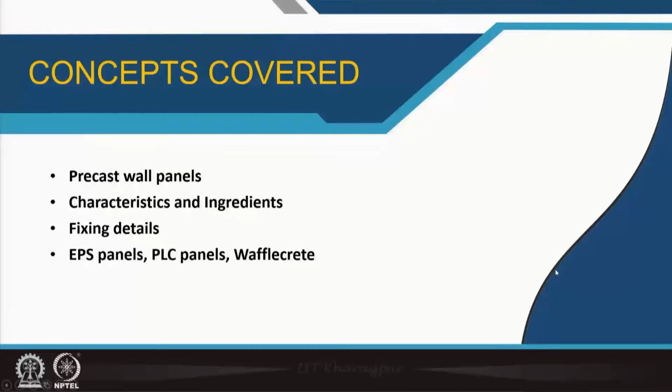Here we will be discussing precast wall panels, their characteristics and ingredients, the fixing details, and also other kinds of panels - EPS, that is expanded polystyrene panels, large concrete panels, and wafflecrete, along with puff panels. But these are mostly made from concrete.

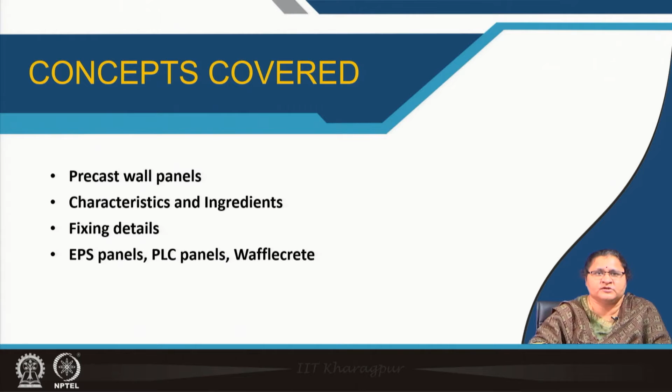These panels are dimensioned relative to their thickness. If you are planning for something very thin, 48 times that will become the thickness when it is flat. If you have corrugations, it will also be 45 times when corrugated - this is a thumb rule. So if you have 30 millimeter thickness, 30 cross 48 will become the size.

Usually the composite panel varies between 95 to 180 millimeters. Composite refers to two panels with a central space, which may have a void or be filled with some material to hold it together. These panels are separated from each other.

But if you are not looking for thermal comfort, you can work with a single layer or single panel. So something around 1.5 meters by 1.5 meters will be its dimension if it is 30 millimeter thick. A 60 millimeter thick panel will have a 3 meter by 3 meter size without corrugation, and any damage to such thin walls can be repaired.

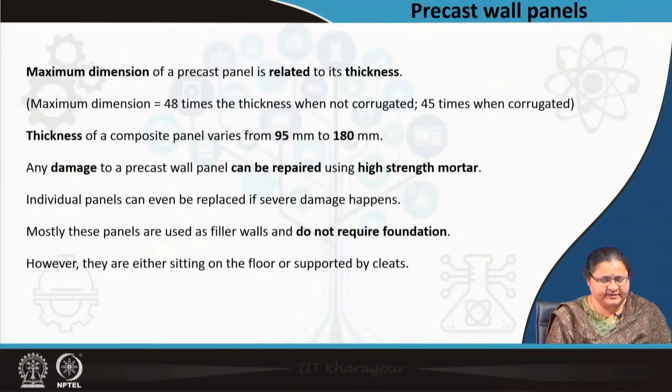These can withstand a load up to 35 Newton per millimeter square, and there is no requirement of formwork. It has very little maintenance cost and is less labor oriented on site because these are already made by a labor intensive process in a controlled environment. And as I told you, when it is a non-load bearing wall, it is a curtain wall. For high-rise structures, these are preferred.

For underground structures where you require to retain the wall - basements below the earth - we usually go for concrete walls. Instead of cast in situ concrete, you can assemble the panels one after the other to create the coverage of the basement wall. What is important is the joints - we will come to that.

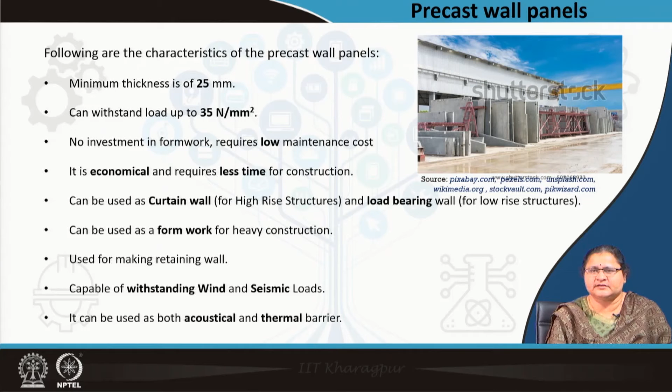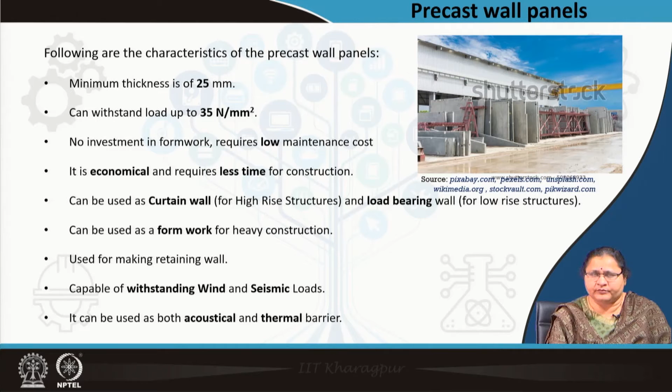These panels are further capable of withstanding wind and seismic loads because they are large in size, and they can act as acoustical and thermal barriers when they have a composite nature - that is, two walls together with an air gap, or filled in with EPS or glass wool. So now we move to how they are fixed. As you see a clearer picture, there are many points for anchorage, and you can also see some rods popping out.

So these rods, when they are popping out in this picture, on the lower end you can see there is a place to receive that. So the panel below it will be held at these points with these projections outside. So there is a dowel system.

There is a drawing after this, so I will go to that also. You can see here they are anchored at several points to lift it. Again, there are dowels projected out to rest on the previous one to receive the upper panel. So this one will go and sit on the dowels left below it.

Other than that, there is the backer rod, which I was discussing in my previous lecture when I explained the CMU block being assembled with an iron or steel column. There was a provision or gap through which water and air would have entered. Here also, when two adjacent blocks are sitting, you have to seal that joint. You cannot use mortar, no one can go and put mortar for a 3 meter length. So there also you need to have a dry seal.

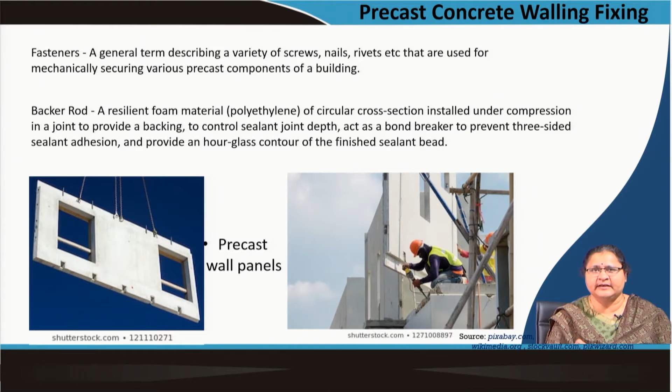Other than this backer rod, sealing etc., the fasteners are being used - the screws, nails, rivets etc. They all refer to the mechanical processes which may be required to tighten the panel in position or keep the panel in position.

So here you see a schematic drawing. These are the dowels, so dowels are embedded when it was made, and these are the slots which are kept to receive the dowel. So these are hollows left to receive the dowel. On the upper side it is the dowels projected up, so they will go on which the above member will rest further. So inside you can see void.

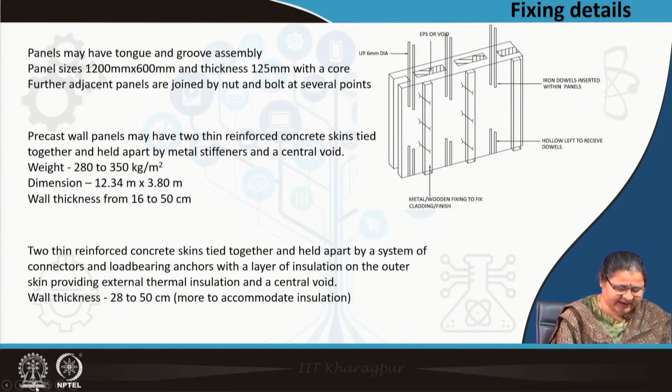What more you can see? You can see a notch. Sometimes if it is quite thick, you can have a tongue and groove joint, so two members can slide one inside the other. So you can have something like one member moving into the other member. So here you see there is a tongue and groove kind of joint here as well as here. Simpler the better, so you can assemble it this way.

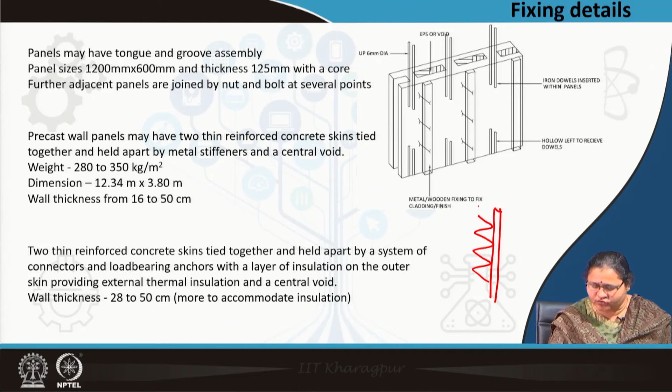You can see some members called the spacers, which can be in this form holding two skins or two precast members with the gap, the required gap. So this kind of spacer you will see is separating the two members. So there may be another spacer at interval, there may be another spacer after some time.

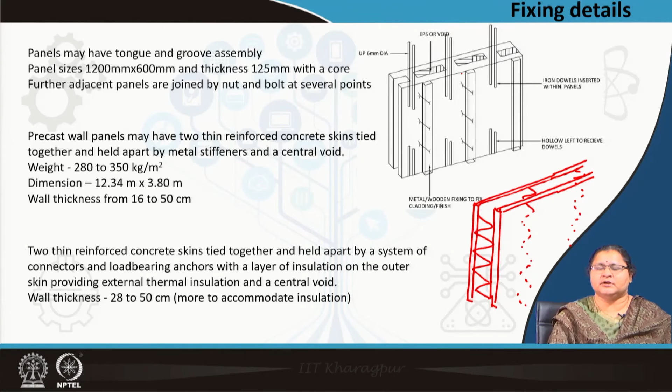Inside it is totally thorough hollow, or else it could be filled in with some glass wool or EPS - the full form is expanded polystyrene, we will come to that. So various thicknesses of individual panels held together in position by spacers can be cast and brought.

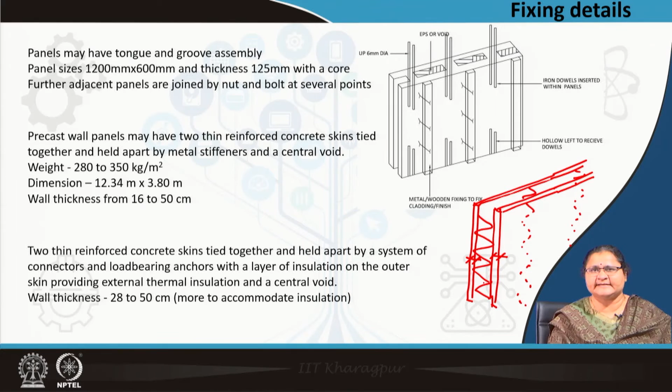Here you had seen the joint. If it is a steel section, your entire panel could rest inside the steel section, so there is no groove here, so it could move into that. So if it is a heavy section, this kind of panel can enter here.

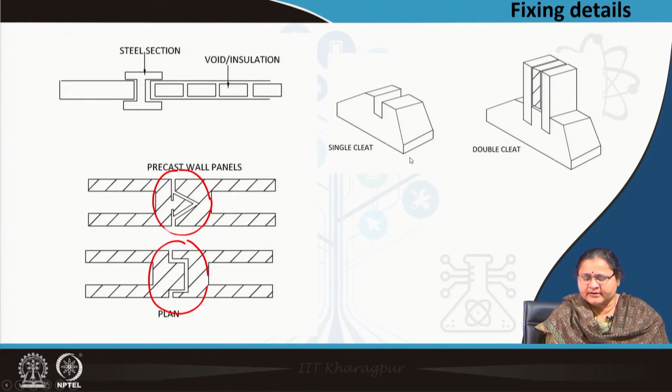Coming to the cleats, how it rests on the floor - these are cleats, these are supports made with concrete onto which the panel rests, onto which the panel is resting. So the panel will be passing through this and it will be resting. There may be another cleat after some time, so this interval, this overhang etc. are to be calculated out.

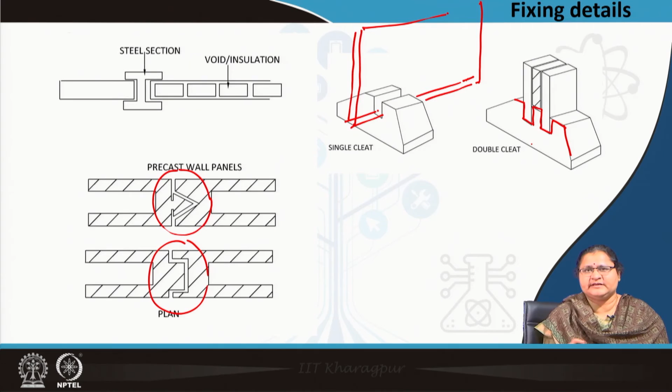Here also you see this is a double cleat, so there is a double notch, so there is no possibility of movement of this member. So this is the panel sitting - here I have drawn that, here it is already made. So it is a double panel within a double cleat, so it is resting on the floor. Hope you understood the phenomena.

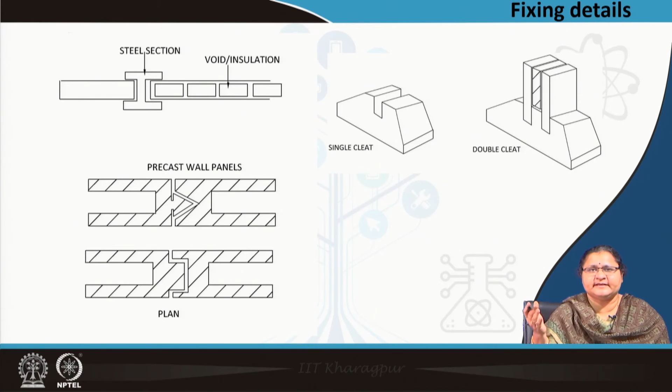Apart from this, you require to know the sealing, which I have told you - sealing with a backer rod and the sealant all along the joint which is experiencing the external environment.

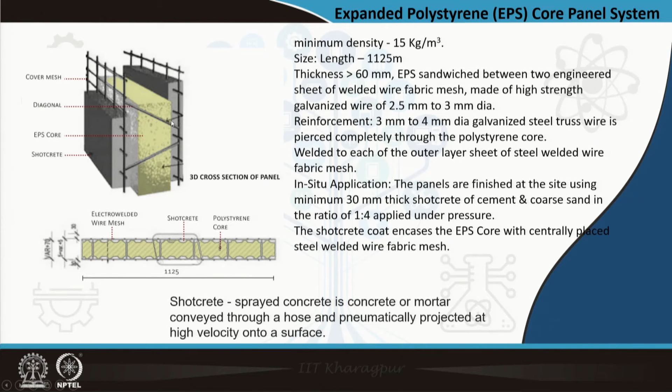This is expanded polystyrene core panel system. This has been developed lately by BMTPC in India, the Building Materials and Technology Promotion Council, and you see here the details are given - the density, the size, the thickness etc. What you see here, what comes on site? It is the mesh which is with EPS, and this mesh is held by spacer. You can see this rod diagonal. So this mesh on both sides and this spacer passing through the EPS is holding the mesh together in position.

On bringing this to site, what is done? This concrete is being applied locally on site, that is called shotcrete. It is a very thin layer, 30 millimeter, it is sprayed concrete.

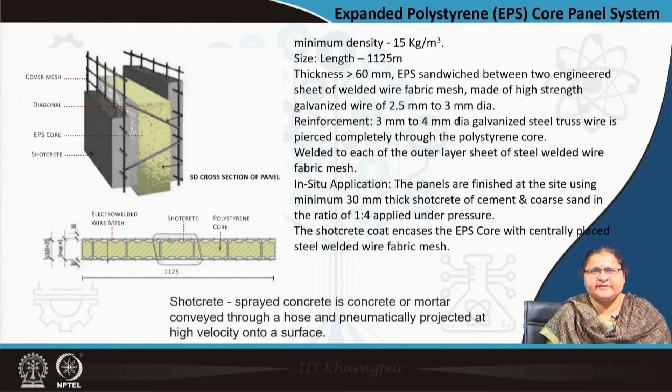So it is not a wet process like what we usually do with cast in situ. It is a nozzle, pneumatically projected on top of this mesh, which is almost a 6 millimeter by 6 millimeter rod grid, and this is creating the wall. So it is partially prefabricated, but one has to know how to spray this concrete, which is called shotcrete. Remember the term shotcrete, it is sprayed concrete or mortar conveyed through a hose and pneumatically projected at very high velocity onto a surface. This reinforcement helps to make it stiff and it forms the wall.

When you are planning for all these precast items, you have to remember the service lines. You cannot forget or neglect them. Is it easy to work on top of a precast member? Is it easy to nail? Easy to cut a chase to put your service line? Considering you as architecture students, you may have covered the services part or you may not, but these require a lot of conduits that are to be drawn. So this EPS or any hollow section may allow you to plan for the service lines, but if it is not planned for, it becomes a problem for the entire process.

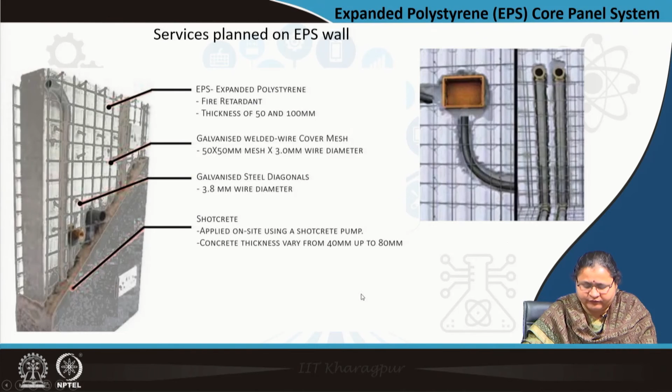Here you see on this EPS section all the service lines are being made, and only after that, leaving the openings not to be sealed, the shotcrete is applied. So this is partially taking care of the service lines. Any precast panel, as I told you, a schedule has to be made through which the lines move, drawn earlier, and provisions made for the routes to move. So that is the major drawback of the precast unit system.

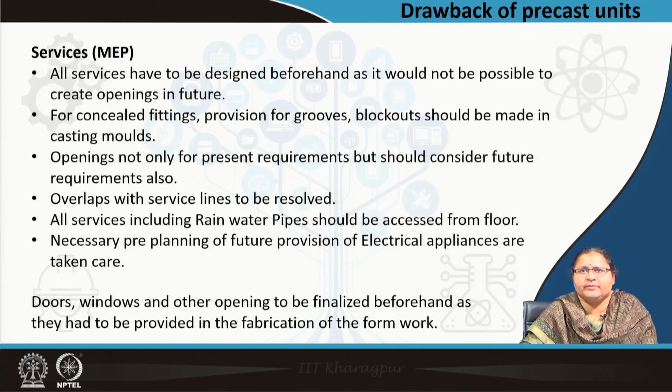All mechanical, electrical, plumbing together are usually called MEP. The MEP services have to be designed beforehand, as it would not be possible to create openings in future. Moreover, any expansion program should be considered. So future planning should be incorporated as concealed fittings, provision for grooves, blockouts should be made in the casting mold. Openings not only for present requirement but, as I told, for future are to be accounted. Rainwater pipes, electrical lines, sanitary lines, wastewater, supply water, all to be included. Even doors, windows and other openings are to be finalized beforehand as they are to be provided to the fabricator, and necessary actions would only be taken if the drawing reaches them. So everything is to be pre-designed, which is the major drawback particularly of such precast items.

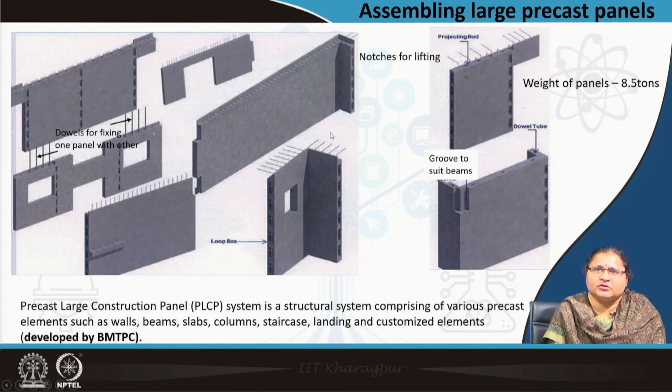This is a large precast panel, so you have precast large construction panels. Here you see even the bends are there, even two openings are there. It is connected, you see the dowels are left which will go and be received. This has also been developed by BMTPC. You see here at this end, a groove to suit beams, so it may receive a beam also which is precast, which we will discuss in our next lecture. You can have projecting rods to receive a floor slab. So till now we were discussing panels sitting on the structural system, but here we can see there are provisions of plugging in beams, columns, receiving them, and you can actually carry on.

So if you carry on, if you remember GFRG, glass fiber reinforced gypsum - there in gypsum, glass fiber was used to make it strong in tension, and walls were made out of it. It was a hollow unit, and in each hollow we could strengthen by pouring concrete to receive the sanitary fixtures, whatever.

As a need of the hour, we need faster construction technology into our building system, less energy consumption, and we need to switch over to such kind of construction systems. We have switched over till we could, like the CMUs and AAC blocks are now much into practice, but we cannot move further ahead unless and until we have skilled labor to maneuver these mechanical equipments and methods. So training is required. We have to have the skill set on our laborer's side. Once we can do that, we can actually take a leap in meeting the demands which are really important, particularly in the housing sector maybe. We can go for faster constructions.